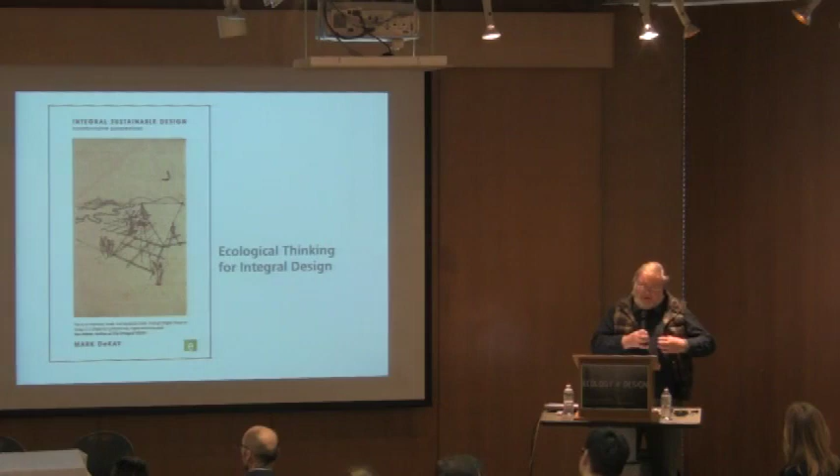Mark DeKay is a registered architect. He specializes in sustainable design theory, research, design tools and practice, and he's taught at the university level since 1992. He comes to us currently from the graduate program in architecture at the University of Tennessee in Knoxville, and he chaired that graduate program quite recently for a few years. His recent work is in integral theory and its applications to sustainable design, and it's there that Mark and I started to overlap maybe several years ago.

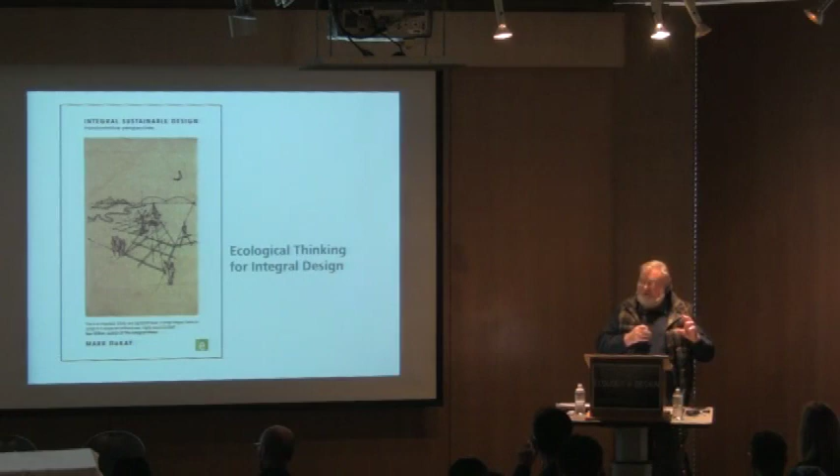We actually have never met one another in the flesh until yesterday, but we feel we have been in face-to-face contact for a long time, mainly because people who know us in common always say that we should meet one another, and eventually we have. We share this interest in something called integral theory, and I am delighted that he is here to provide you with an overview of that, because I have never been able to accomplish it yet in this faculty especially, and I'm glad to have someone else to give it a try.

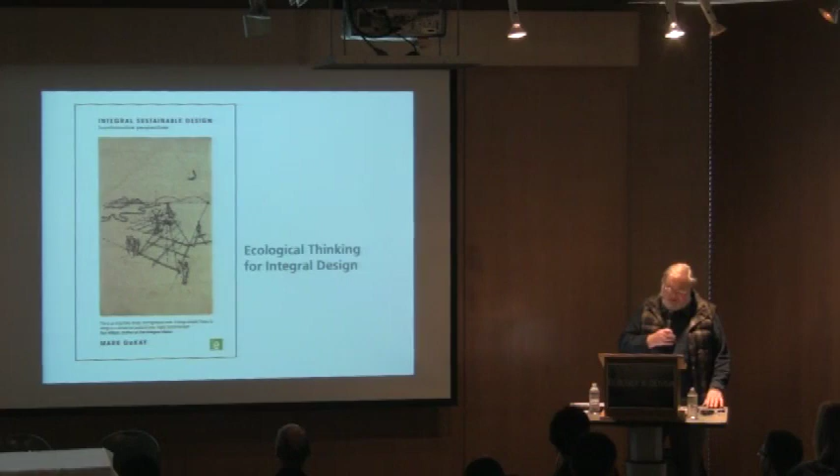He is going to be talking quite a bit about his latest book, which I would certainly highly recommend, Integral Sustainable Design: Transformative Perspectives. But you should know he also has another major publication with G.Z. Brown on Sun, Wind and Light: Architectural Design Strategies. The third edition of it is being worked on right now and will be appearing very soon.

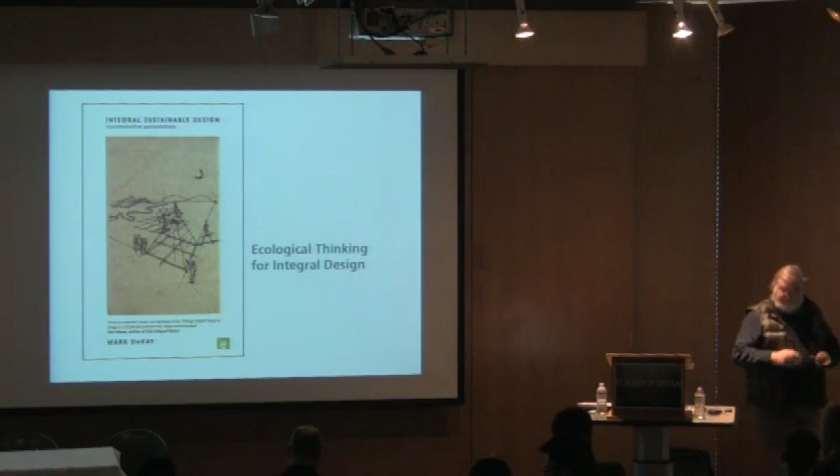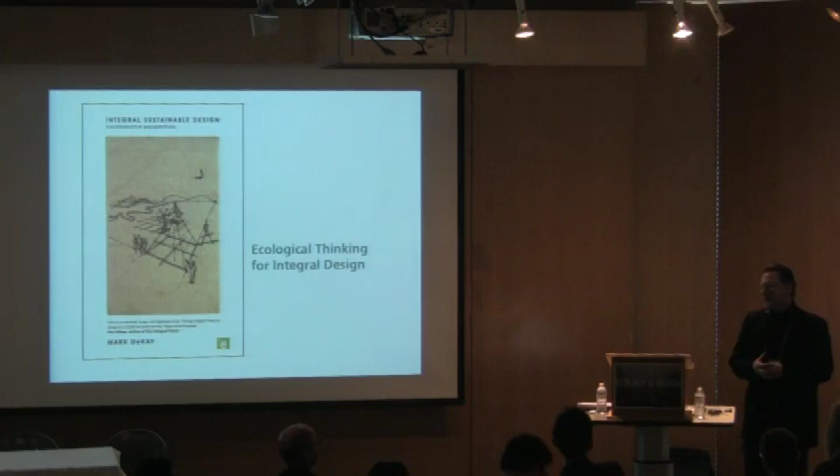Good afternoon, everyone. Can you hear me all right with the volume? Great. Well, thanks for coming. We're really excited to be here with all of you and with this kind of topic of architecture, design, ecology. It's really a gift to come with this invitation.

I'm also here with my wife, Suzanne, and I'm going to bring Suzanne up here to give us a little framing of the talk, and then she'll also be working with me in the Q&A. Suzanne is not only my wife, she runs my research lab, she's my intellectual partner, and she's also the editor of this new book. If there's any intelligibility and readability in the work, she's responsible for all of that. So, Suzanne, will you get us started?

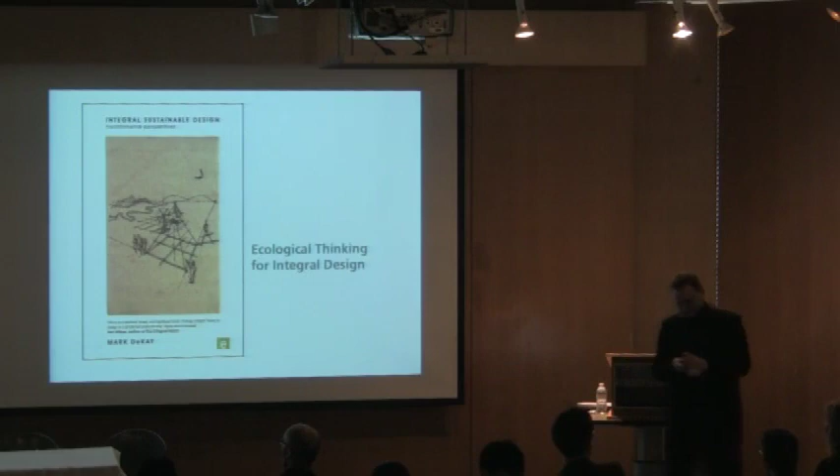Well, that was a nice introduction. Thank you, honey.

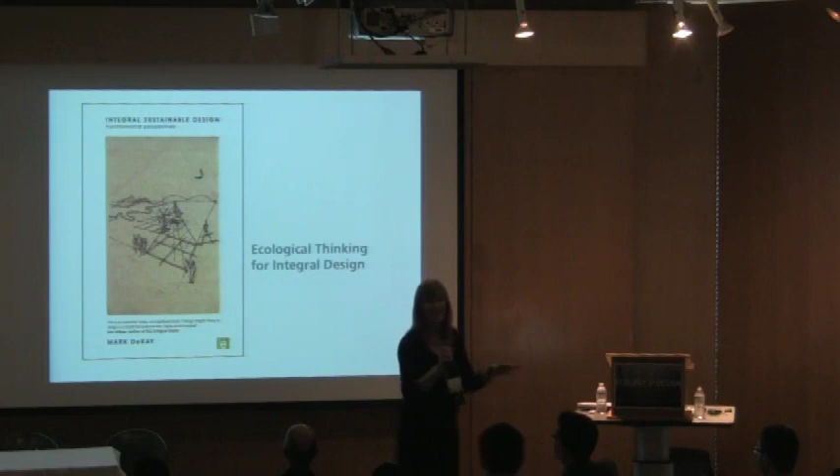The way that I'd like to set this up is to invite you, as you listen to Mark's presentation, to listen in a generative way. There are different ways we can listen. We can sit passively and let stuff roll over us, or we can get excited only when we hear something that relates to what we're particularly interested in. But with regard to getting anything from this talk, we've only got an hour, and we're probably not going to be here again soon. This is our moment, this is our time. So the invitation is to listen with elephant ears, and an open mind and an open heart.

Because some of this work really requires you to throw yourself up against the wall and rearrange your molecules, it's not easy, so if your brain hurts, that's good, that means it's working. I would really like everyone to shut off any kind of electronic devices. And as a group, let's constitute ourselves as a generative group, here to actually discover something together, here to help each other listen and hear.

That really requires not answering your boyfriend's email or texting or Pinteresting or whatever people are doing. I'm old, so I don't do all that stuff, I have one of those stupid phones. So that is my request, of course you don't have to accept it. But if we do listen as a generative group, I assert that something else will come out of our being together in this hour.

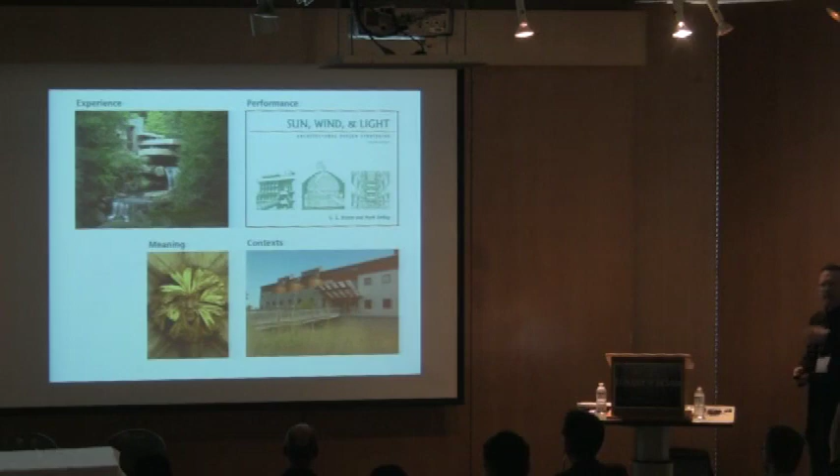And then there were other people interested in conversations about what buildings have to say to us culturally, what they mean, what the symbolic language of architecture might be. I had no idea what they were talking about either. So I began to recognize there were many, many conversations going on, and I needed to figure out how to process all of this and put together for myself at least a framework that made sense.

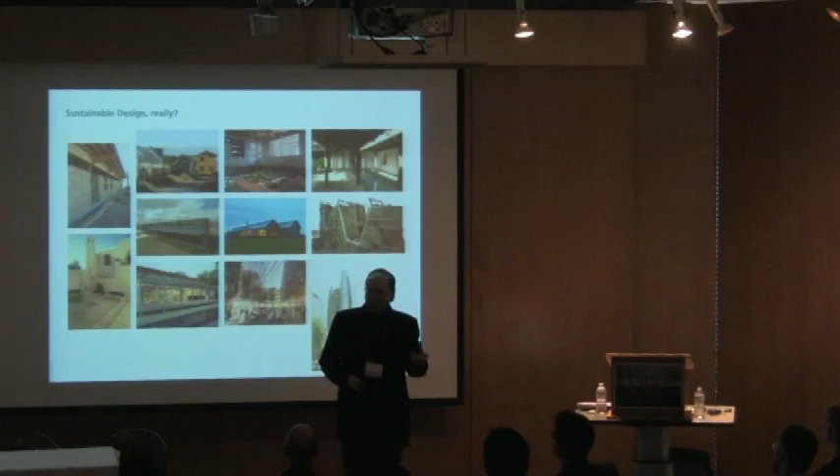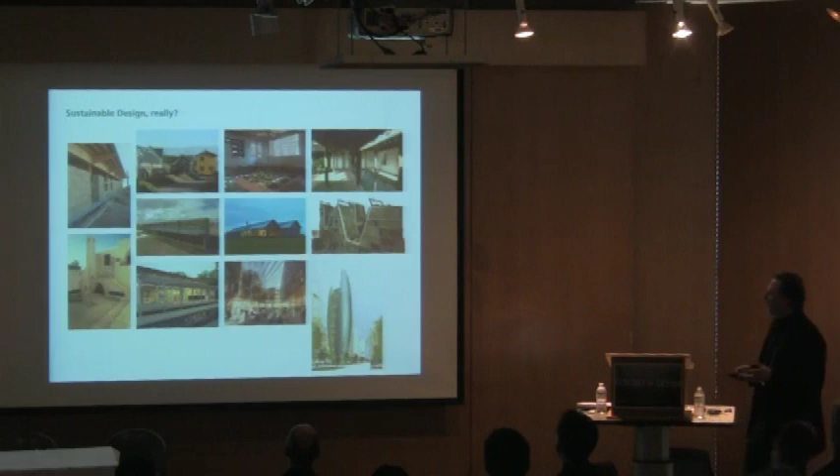As I began to look at sustainable architecture, I found straw bale buildings and traditional architecture from the vernacular perspective. There was high-tech building. There was Paolo Soleri with arcology. There was every imaginable thing out there that somebody was calling sustainable in one way or another, and how could you really make sense out of this?

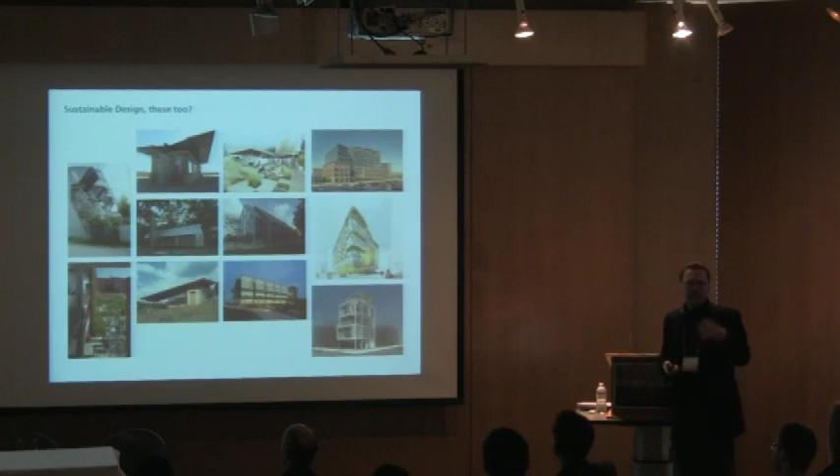And then even more: German high-tech solar architecture, sliding houses with greenhouses, landscape architectural approaches to ecosystems in gardens, and LEED certified buildings that you couldn't distinguish from the next mixed-use office building down the street that used 3 times as much energy. So I still couldn't make sense out of all of these, and that was the project.

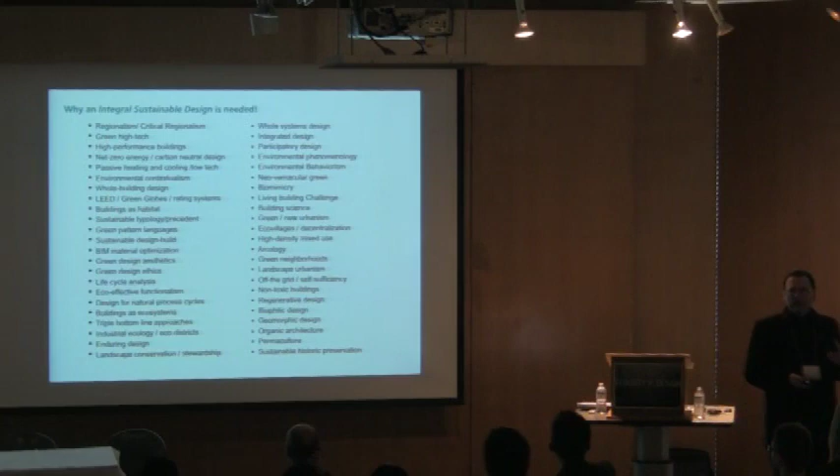I began to write down, and this is only what would fit on the slide, many different kinds of approaches to sustainable design. If you start looking around at what people are calling sustainable or green or anything in that category, there are 100 or more different disciplinary, intellectual, and methodological approaches to sustainable design. That was why I thought we needed an integral sustainable design approach.

I want to start with what I call the 4 perspectives of integral sustainable design. The talk today will be in 3 parts. We'll talk about this first, then levels of complexity, then some specifics about ecological design thinking. That's really the theme today. We're only going to look at a portion of the general content, but focus on the topic you've come here to think about, which is the intersection of design and ecology.

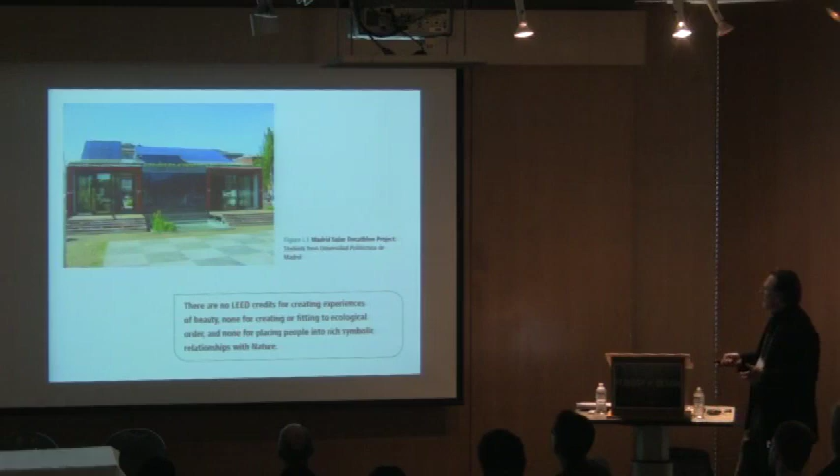But what's interesting is that if you look at something like LEED, there's no credits for whether it's beautiful or satisfying, whether it gives you a rich human experience - there's no credits for anything other than whether it's efficient. There's no credits in LEED for whether it's actually fit to some ecological pattern or context, or whether that efficiency makes sense within an ecological logic. And there's nothing saying maybe a building could establish an important relationship between people and nature. That just doesn't enter the sphere of that perspective on the world.

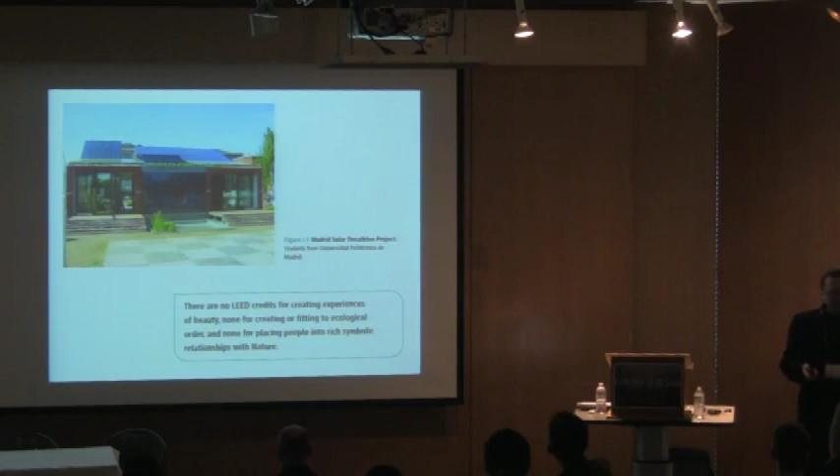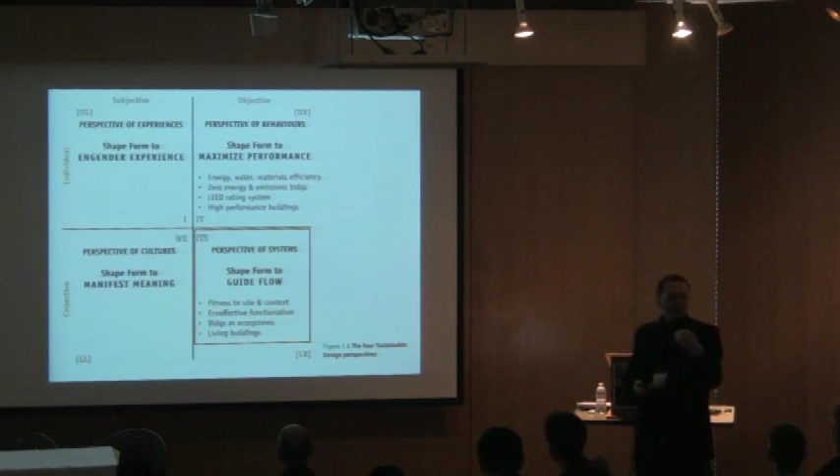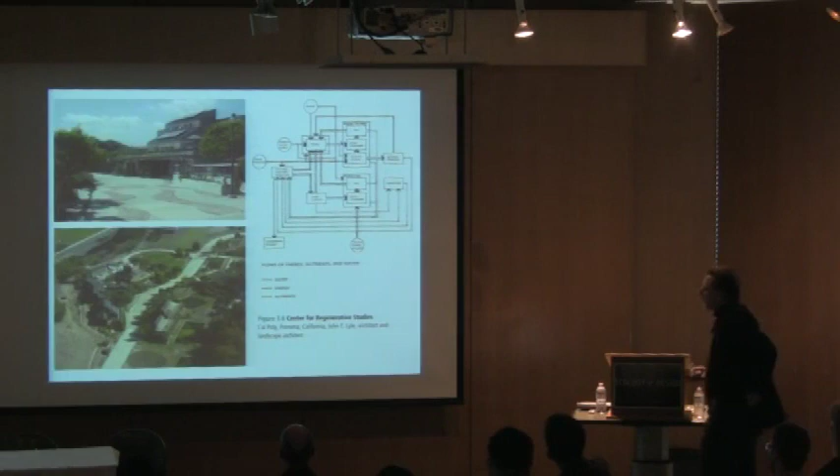Here's an example of that kind of thinking: the Center for Regenerative Studies at Cal Poly Pomona, California. It's a building that lives on its solar energy income, collects and stores its water, recycles it, creates artificial wetlands to process and clean waste on site. The students being educated here about living ecological systems live inside the facility, so it's participatory, educational, symbolic, communicative - and they're growing their food at the same time. That's an example of looking at the form of the built environment as an expression of the underlying ecological flows that keep things alive.

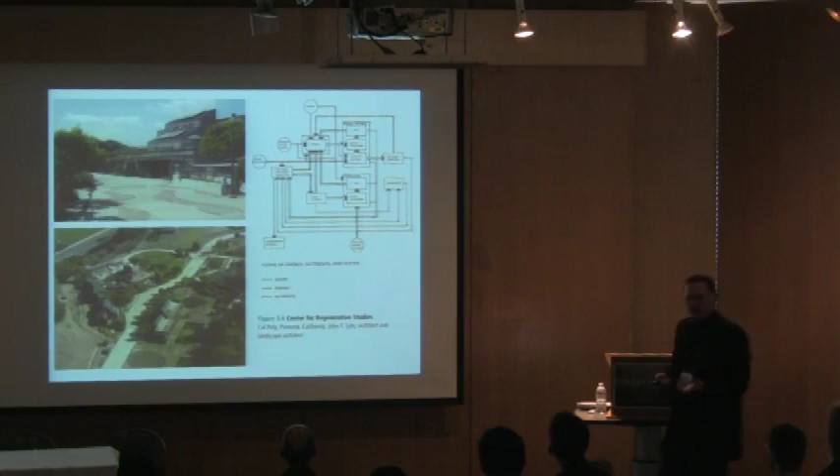From the lower left perspective, I ask the question: how do you shape form to manifest meaning? There we're interested in how people and the built world are related to nature. We raise questions about the aesthetics and the ethics of green design, and what kinds of stories we tell through the designs that we make.

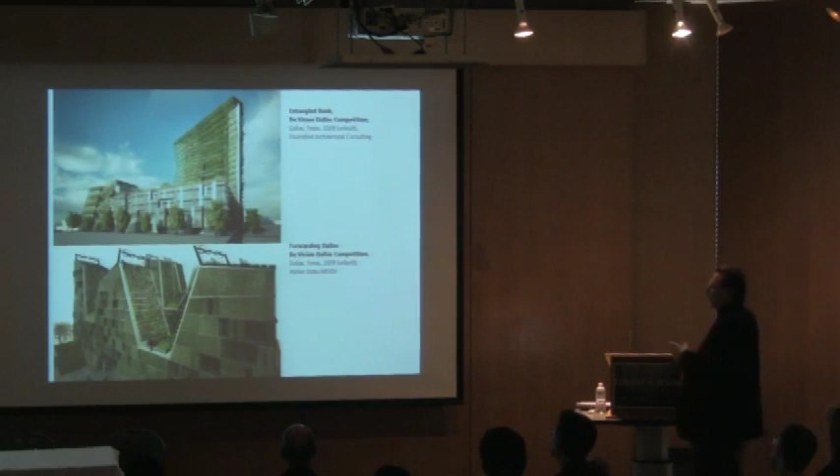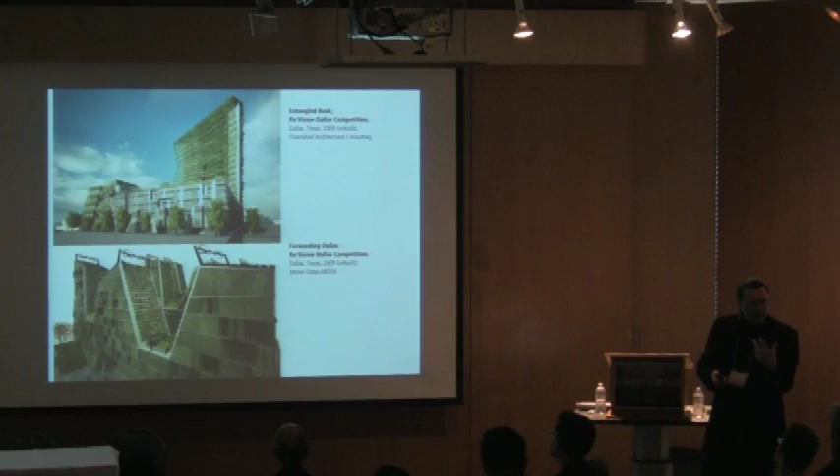Just as an example - a couple of different examples, although they look like they might have been done by similar designers - for a kind of visioning competition in Dallas. Projects that I think bring forward and attempt to express the relationship between the built world and the natural world, growing food, and so forth, telling a story through that composition of architectural form.

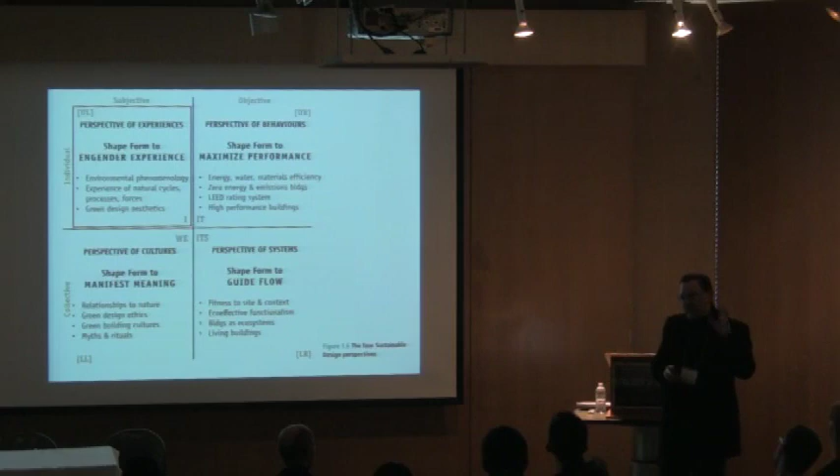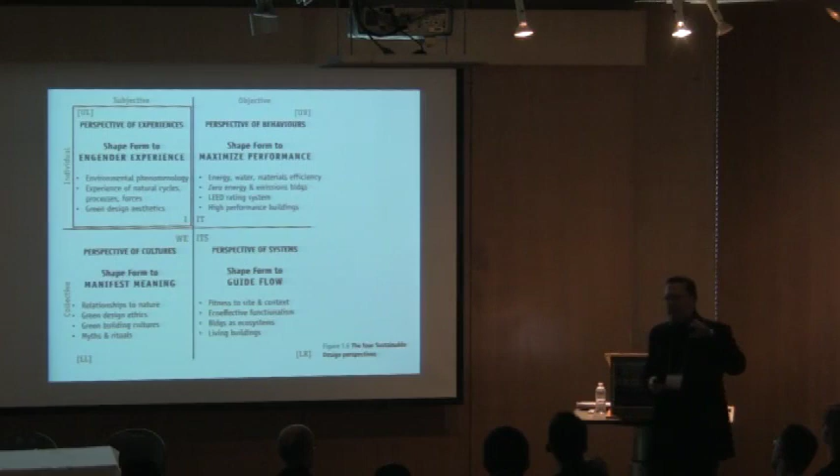Or the upper left perspective, where we're interested in engendering rich human experiences - those are the perspectives taken by aesthetics. In some realms of design, I don't know how it is in your school, but not only did I never hear the word aesthetics or beauty in my entire architectural education, graduate and undergraduate, but I can count on one hand the number of times in my entire career - and I've been teaching since 1990 - that I've heard beauty or aesthetics mentioned in an architectural design critique, in anybody's class. So these are perspectives that exist, and they're obviously a part of the built world, but we don't always necessarily have a language for them.

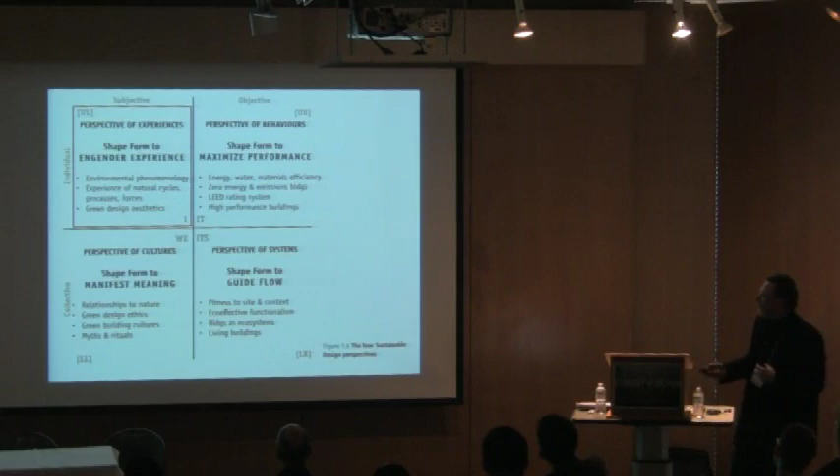So just as an example, a project by Glenn Murcutt, the Australian architect, the Marie Short House, a well-known project, which is a very simple project that just kind of sits there on the land being passive. But it's passive because it's taken into account a huge amount of complexity, like orientation, the cycles of the sun, the patterns of the wind, the geology, the trees, and everything else. His stated intention is really to set up an experience for people so that they're tuned in to those rhythms and cycles and experiences.

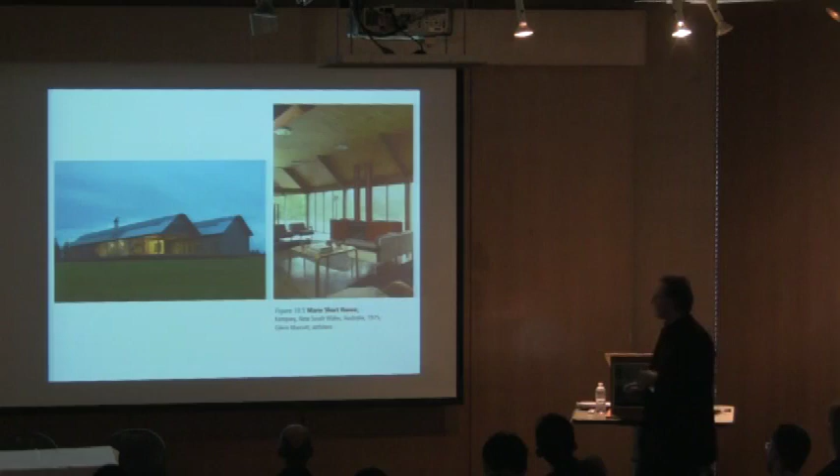So if I'm an engineer, let's just pick on engineers for a minute, and I take the perspective that the only thing that's valid or valuable in the world is that perspective of behaviors, and I'm only interested in how efficient I can make something, then I'm leaving out a whole bunch of things that are important to design.

On the other hand, if I'm holistic, right, so I moved from being a gross reductionist to being what Wilber calls a subtle reductionist, or a holistic thinker, or an ecological thinker, then what happens is all of the interior realms can get collapsed, so that the only thing we think is important is that systemic, holistic, ecological, objective view of the world.

Now, if we're over there, it doesn't make any of this invalid. You just can't go over here and talk about anything to do with meaning, culture, aesthetics, or experience from the point of view of systems thinking. And that's really important because that's what I'm going to be talking about.

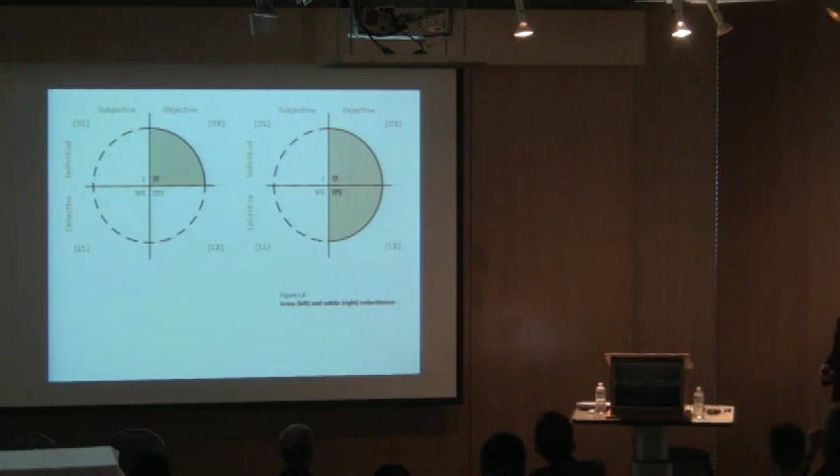So I'm going to be talking about this perspective mostly, and we have to remember that it's one of a multitude of perspectives that are important, and it's valid and true in its own domain. But its methodologies cannot be used and expanded and pushed over into other domains or do violence in any way to them. Now, I'm not the only one to start talking about this stuff.

So then I began to think, well, that's great. That explains some of those conundrums I was in at the beginning, and how I could begin to map out why, if I was speaking from one of those value domains or perspectives, people who were really oriented and saw themselves thinking from or looking from those other perspectives — why what I was saying wasn't really landing on them, and maybe they weren't as excited about it as I was. But it didn't quite solve everything.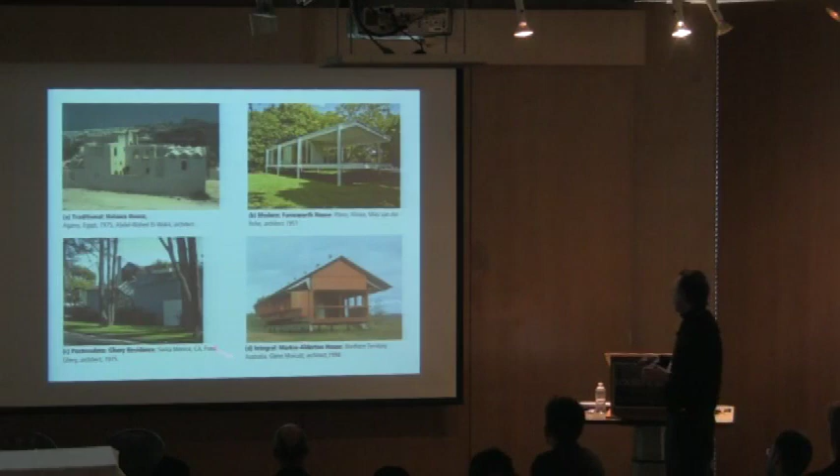So I began to look at development. In integral theory, developmental models and developmental sequences are very important. We're mostly familiar with this kind of sequence, although we tend to associate it with styles and time periods, neither of which I think is accurate. What we really have, in the progression from a traditional way of thinking about design, to a modern way, to a Frank Gehry postmodern way, to what I'll call an integral level of thinking about design, is a shift in consciousness, a shift in worldview and a shift in values. Those values—don't get stuck, you architects, on the imagery—but this shift makes possible a new view of the world, bringing forward new possibilities that show up within the realm of design in different expressions.

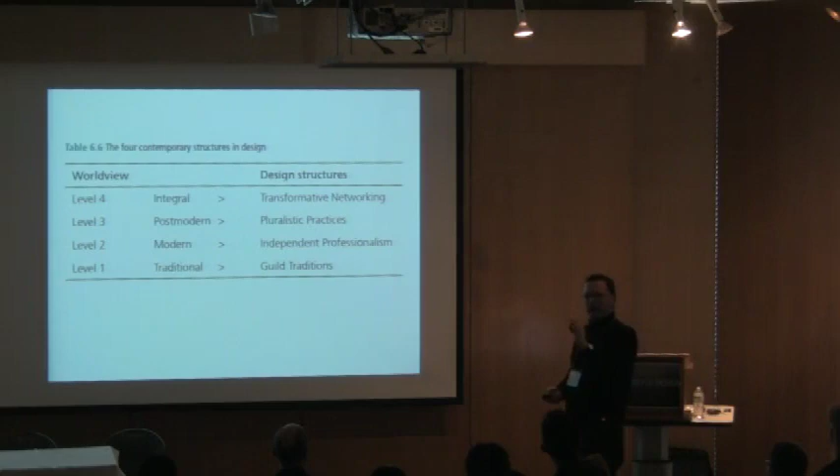So I organized it like this: we can have at least these four, and we could probably go further down—the traditional takes into account a lot of previous history and worldviews, and there are probably things beyond the integral. But mostly we have these four kinds of worldviews present today, possibly in this room, but certainly in a neighborhood meeting or city council meeting. So we have the traditional, where the professional structure is embedded in the guilds. We have the modern worldview, where professionals were independent—I was educated in a modern architectural school, and it was all about individual expression. You've heard the term 'object building' perhaps—we were all about object buildings. The more object, the better; the more extracted from its context, the better.

We also have what you might call pluralistic practices. Most schools of design operate at this kind of postmodern level, where there's no longer a single theory—there are multiple theories present at the same time, and you can't put them together, and they don't add up to anything.

But they're pluralistic, and your theory's okay, and my theory's okay, as long as we don't bother each other too much. And then the integral perspective is interested in putting that fragmentation back together. I call that transformative networking. It's connecting those differences, but it's also transforming and transcending the individualism of the modern and transcending the disconnected pluralism of the postmodern.

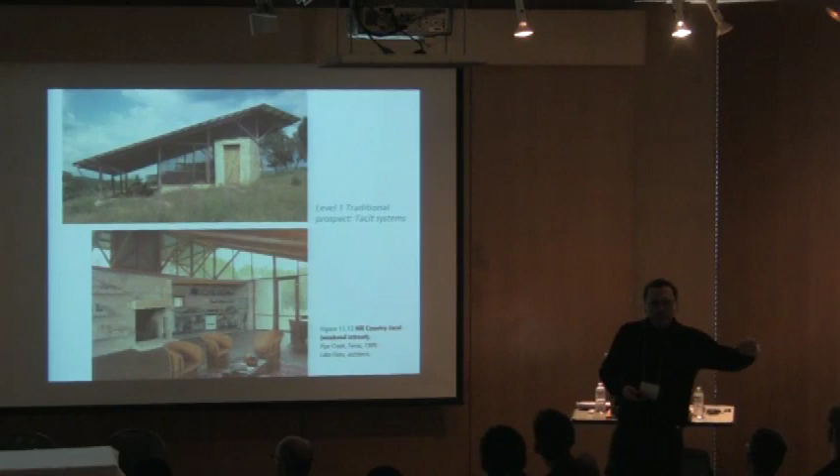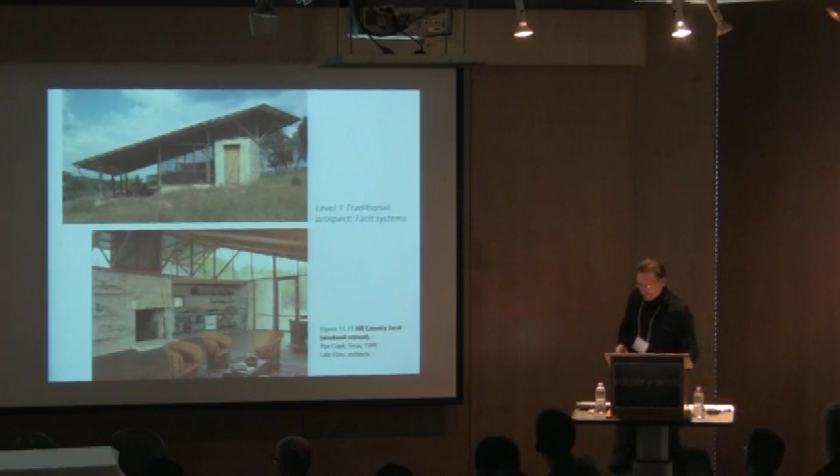This is tacit systems. Tacit systems are essentially things that are embedded. So to the traditional worldview, there is no such thing as an ecosystem. Ecosystems don't exist for the traditional worldview. They don't show up on the horizon of what rises to awareness. They're embedded in the practices, embedded in what works. The things have changed little, by trial and error, typically over hundreds or thousands of years.

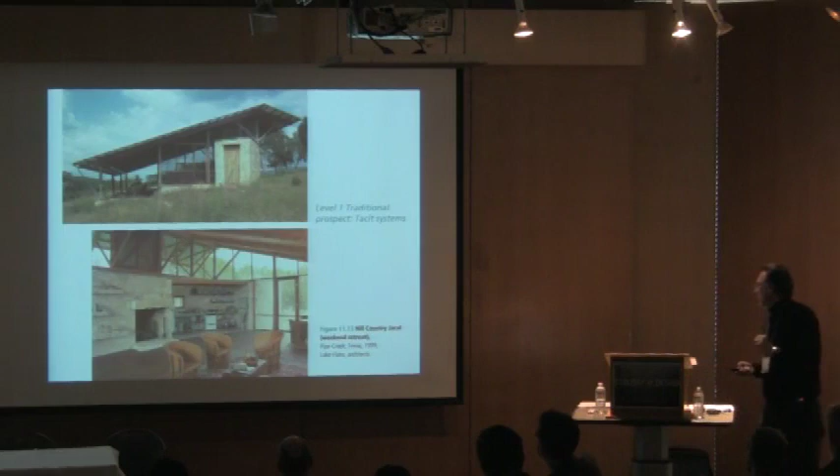And so here's a project that does all those things. It backs up to the north wind, it digs into the site, it creates and modifies all of the kind of cycles of the climate that are going around there to make this kind of little weekend thing in a hot climate in Texas.

Now, the modern prospect on systems is logical. The modern prospect is interested in the system as a way that it connects. So this is the Cellophane House by Kieran Timberlake. It was a proposition for the Museum of Modern Art.

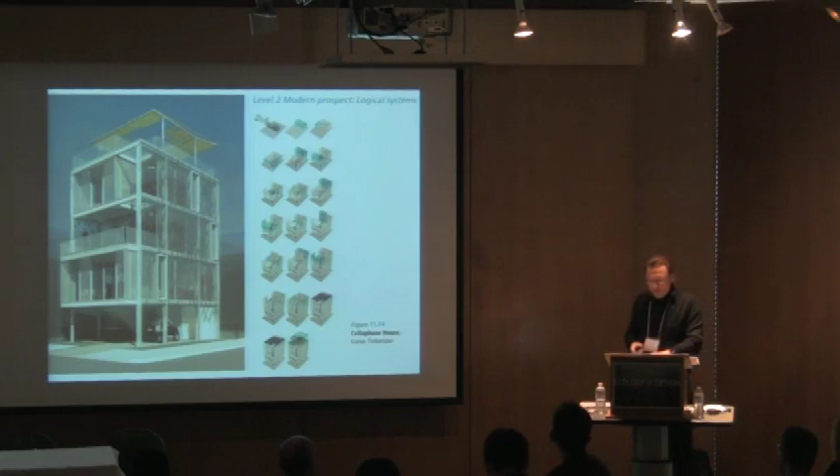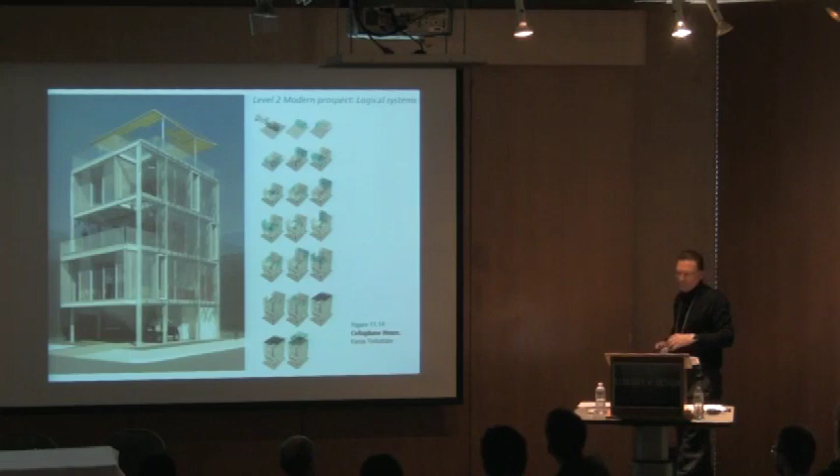And it works together in a kind of rationalized, industrialized way with prefabricated parts and things that are reconfigurable, and you can put the whole thing together and it comes off of a truck and so forth. That's a logical kind of way of thinking about how a system works. It's linear, it's abstracted, it's rational, but it's also kind of organic in the sense of organic architecture—that is, you can design from the big scale down to the small scale, and it all fits together in some way. So that's a different view on what a system might be.

At the postmodern level, you really have to distinguish between the lower left cultural perspective of postmodernism and throw away the visual stylistic expression of postmodernism to get your head around the postmodern perspective on lower right systems approaches. What does reality look like from a lower right systems perspective when you cognitively operate at the level of complexity that postmodernism takes into account? It's very different when you take a lower left perspective of cultures—you say design is what design means inside of the culture. But when you take a postmodern level view on the lower right objective systems, that is nature, right?

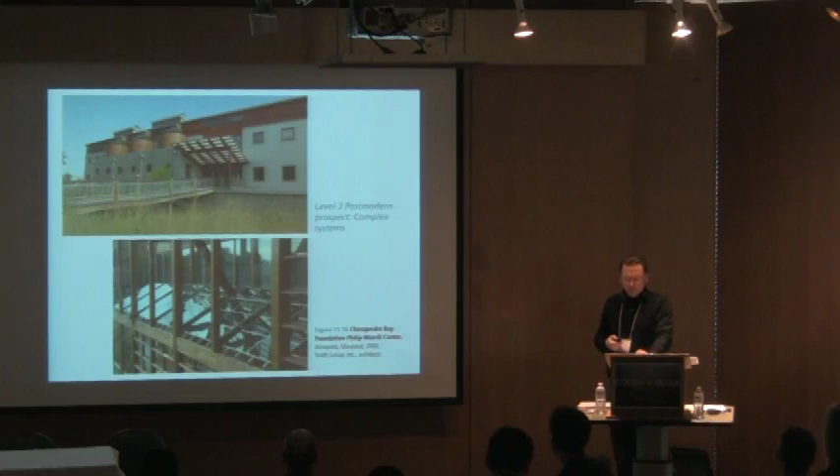It sees things as cycles. It abstracts the models, but it places those models into even larger models. So you start to think about how things are connected and how they organize into what we have begun to call things like an ecosystem. Before, I don't know what the date was, roughly 1920, the word ecology and ecosystem didn't exist, right? We had to wait around long enough for humanity to begin to make enough connections to see that there was something like a system out there in the way that we currently conceive of ecosystem as some kind of a web or network of cycles.

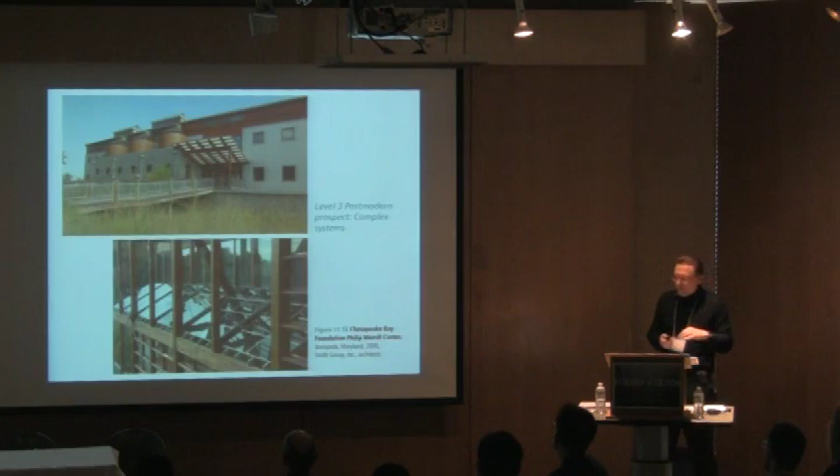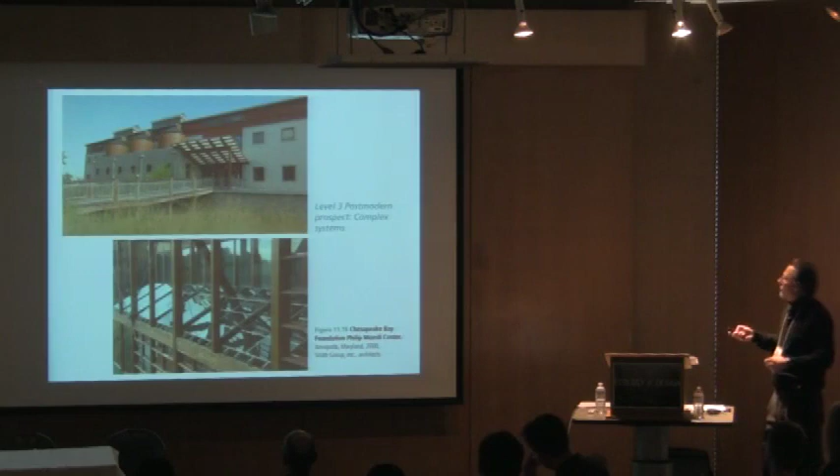So here's a building, the one I talked about in the very beginning. As another example, the Chesapeake Bay Foundation's Merrill Center, the first LEED Platinum building. It's really a building that takes water as its theme. The Chesapeake Bay Foundation is about cleaning up the watershed, and it begins to look at how the building fits into the context of the water cycle. So they're looking at collecting and storing water, restoring and creating wetlands that had been destroyed, and they have permeable paving and all of that sort of thing.

And then at level 4, what we might call the integral prospect, we start to think about living systems. That living systems view is maybe the most complex way we're thinking about things now. It doesn't mean that's the be-all and end-all of it, and that's interesting when thinking about development. Bob Berkebile, a fairly well-known American sustainable architect, says that what designers are really doing is making nature. It's designing for the ecological pattern, so we have ecological systems in which humans are part of a living ecosystem.

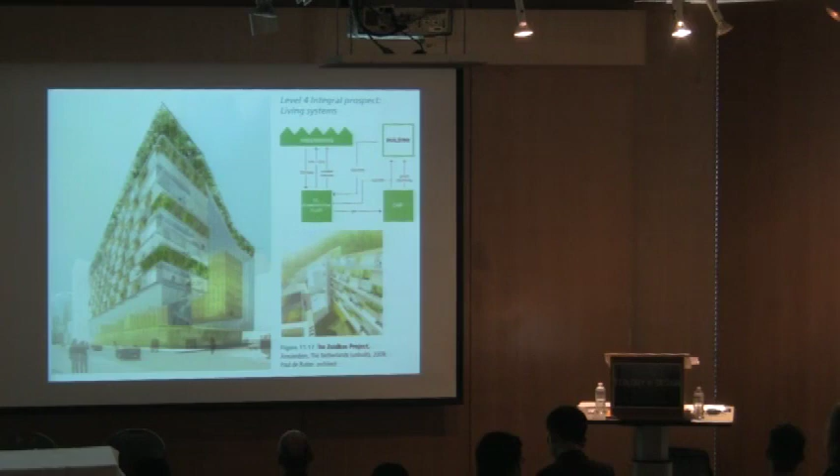Whereas the postmodern perspective is interested in saving nature, the integral perspective that sees the world as a living system says you can't really pull those apart. We're influencing everything on the planet, even the ice in the Arctic, right? And so there's no such thing as an out there for nature.

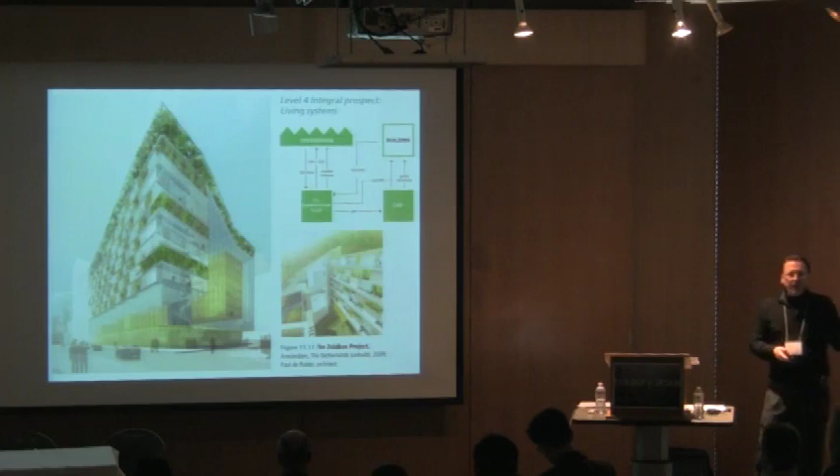Here's a project from the Netherlands, a proposal. This is the idea of having a greenhouse in an urban environment, growing food and connecting it up with the needs of the building, making power and fermenting the biomass that's the waste from the greenhouse, using that for biogas and so forth. So you start to see this whole construction as an integrated set of flows of what it takes to keep life alive on the planet.

Here's an example from Sweden, in the city of Stockholm, where they're taking a whole sector, a whole new town development, and extending that same kind of logic. So here's the architecture in the middle where people live, and then you have all of these kinds of flows of energy, materials, recycling, and so forth, just like a natural system does. So it's learning from natural systems and using those as a model for constructing an urban environment.

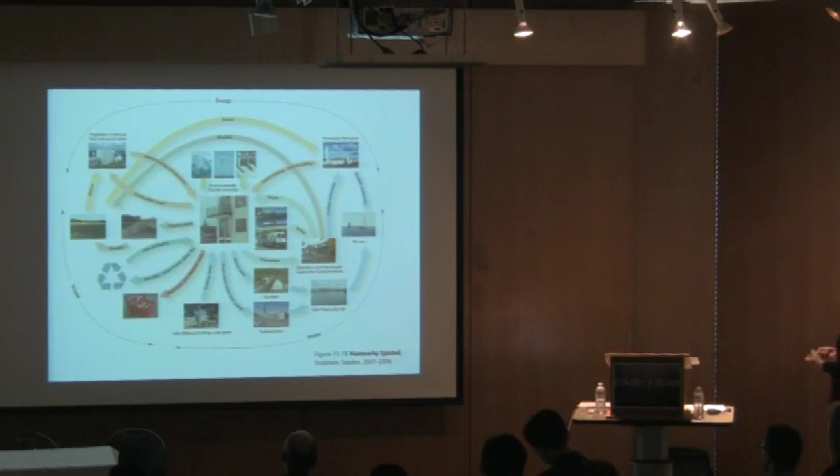Okay, so we've got those. What's that? That's two what? Okay, I got to run then.

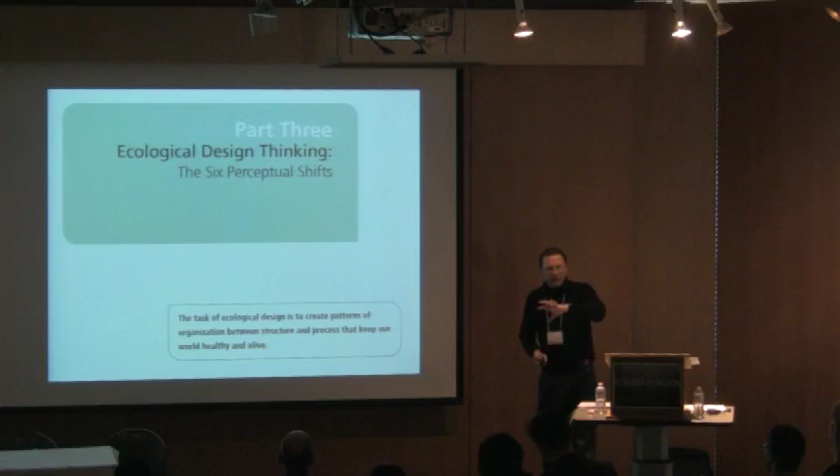Yeah, okay, thank you. So we have ecological thinking, and that's really what it takes for us. So what it takes, if we're trying to figure out what the ecological patterns are in the lower right, is how we have to actually shift our own thinking in our own individual interior from this upper left perspective of experiences, which is also the realm of the individual self. And so there are these different levels of complexity, and what's suggested here is that each perspective can show levels of development, and that it's ourselves that have to begin to look at increasing and changing our own perspective so that we can develop and be able to think ecologically.

Now, I'm not making all this up. There's lots of developmental models and systems out there. One of my favorites is quite simple. It comes from Jean Gebser, who's famous in a lot of fields, and wrote in 1949 about the epochs of human civilization, which he called the magic, mythic, mental, and on the top he called it integral.

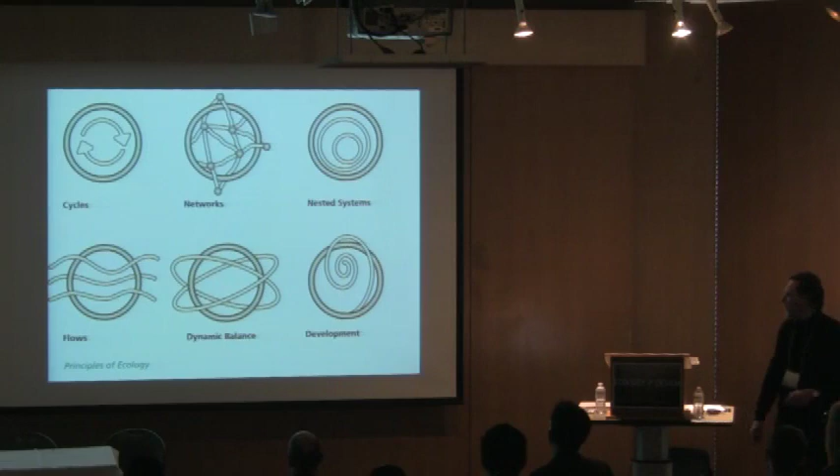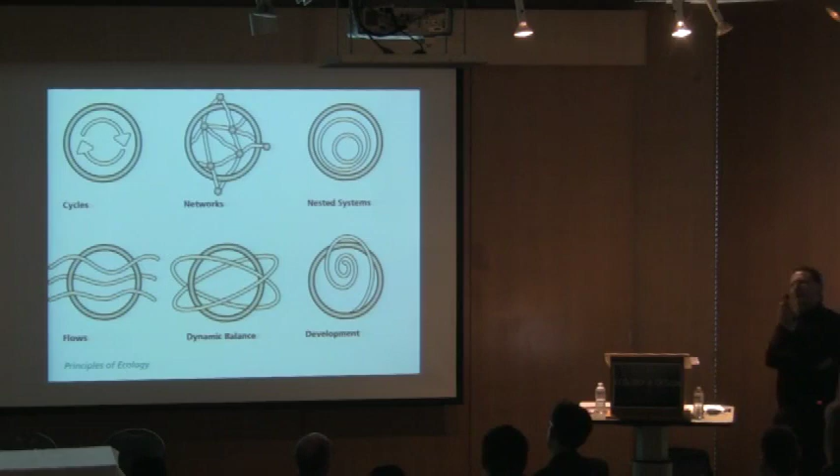It also turns out these networks are organized in nested systems, systems inside of systems, in a hierarchical organization, and that systems over time show some degree of change and development, in some ways toward greater levels of complexity. So the question is, how do we actually begin to see these things in the world, think about them, and design them?

Those require really significant changes in our own perceptions. I'm going to argue that the fundamental perception is this connection between form and process. That's the essential theoretical imperative for ecological design.

Now, form and process are fairly easy to understand. In architecture we sometimes think of it as form and function—we've heard the phrase form follows function. That's similar to anatomy and physiology in medicine. You wouldn't want your doctor just thinking about your anatomy; you want them intimately understanding your physiology too. Imagine the doctor trying to take apart anatomy and physiology—they'd laugh at you, because they're all working together all the time. That's how it is: there's process present and form present, and those are two sides of an interrelated way of seeing absolutely everything.

But we don't really do that all the time. Here's Capra's criteria for living systems: he says you have to have patterns of organization, structure, and life process—those are the three basics. Life process is what makes it go, the whole thing that's flowing and changing. The structure is the object nature, what's guiding the way everything flows—it's the hardware. And the pattern of organization is the geometry, but also the order of things, like networks.

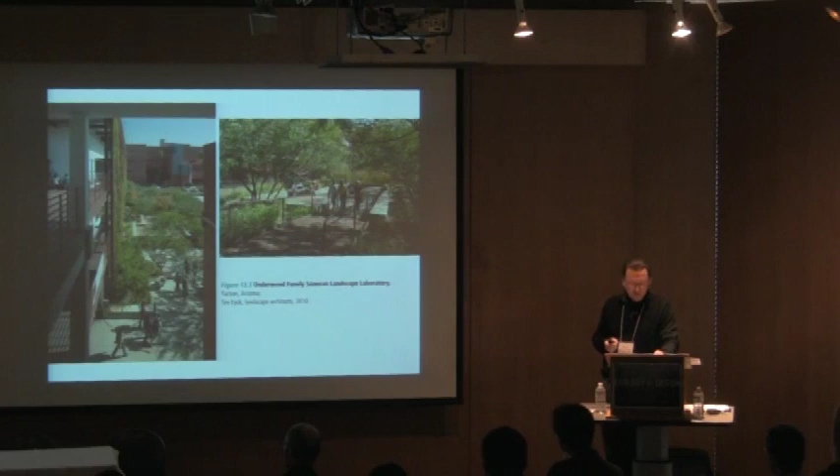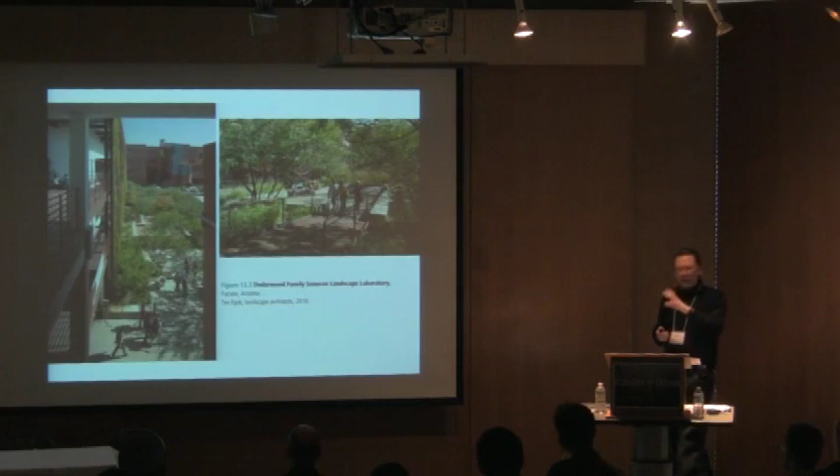As an example, this is the Underwood Sonoran landscape at the University of Arizona, a project organized around ecological and social relationships. It exemplifies sustainable strategies of water harvesting, climate regulation, air and water cleansing, recycling, urban wildlife habitat, and human well-being. But if you look at this landscape merely as a compositional object, as a formal thing, you actually miss every one of those issues—they don't even arise. So it's a shift to see how this thing is made up of a set of relationships.

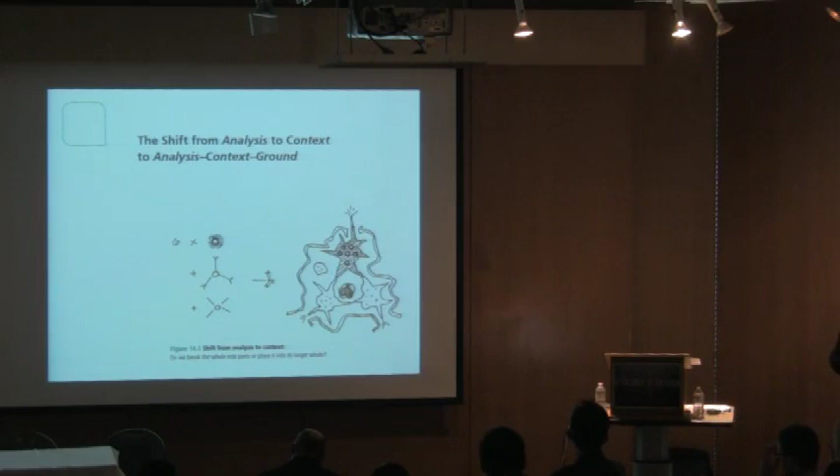Each of these kinds of shifts actually contains two shifts: one is essentially a shift from modern awareness to postmodern awareness, and the second is maybe a shift more towards integral awareness. We don't really have time to go into all of those, so I'm just going to focus on the first one for the most part. They're all in the book though—Susie wants me to remind you—there's a chapter on each one of these things.

The shift from analysis to context asks us to understand something in the world not by breaking it down, not by trying to understand its constituent parts, but by taking that same object or focus of consideration and placing it into something larger—placing it into its larger system.

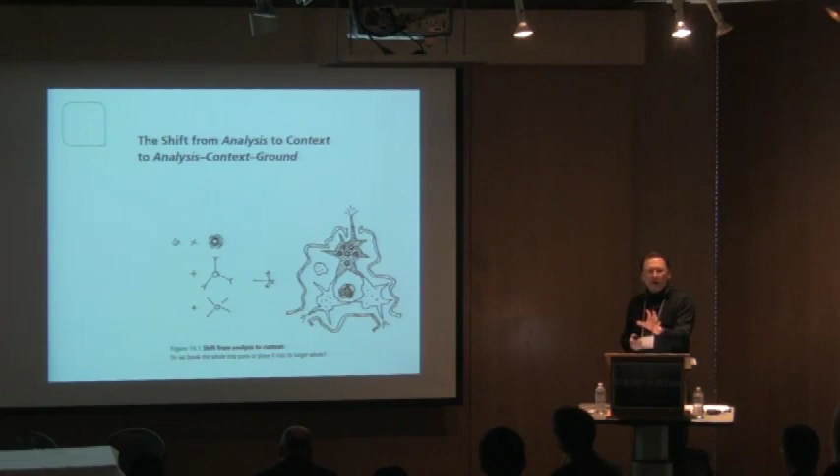If we take something like a wall or facade and look at it by breaking it into its parts—so much glass, so much insulation, so much concrete—that's one way of understanding it, and it gives us something important. But if we place that same facade into the context of Miami or the context of Winnipeg, our interpretation of that same wall is completely different. It's fairly fundamental, and something we're more and more familiar with in design now.

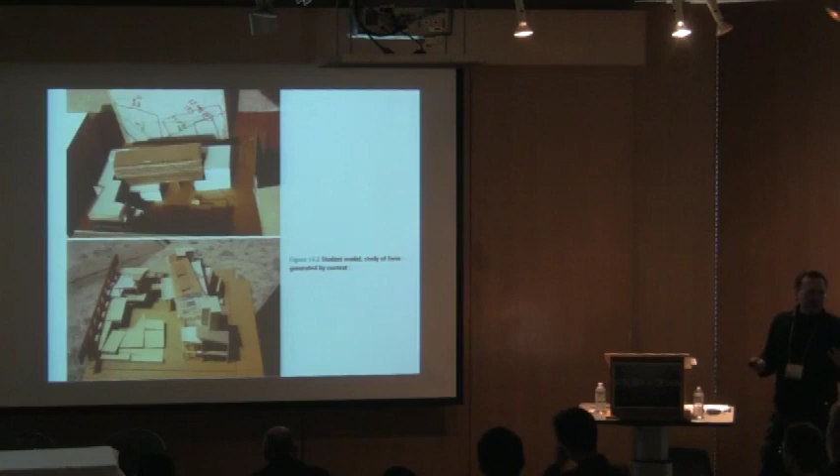Here's an example of a student project in two different phases, very early studies and a bit later studies. This project is set into an urban context with a railway on one side and existing buildings. It tries to understand the context in two ways: what are the patterns of sun and shade created by the surrounding buildings, giving constraints and opportunities to the project; and how can that building be shaped and massed so it doesn't cast a shadow on its neighbor during times when that neighbor might want the sun. It's a fundamental way of looking at context, but one that completely changes how the project might be shaped and formed.

The shift from structure to process: are we looking at the form itself as its anatomy, or do we see its flows and its physiology?

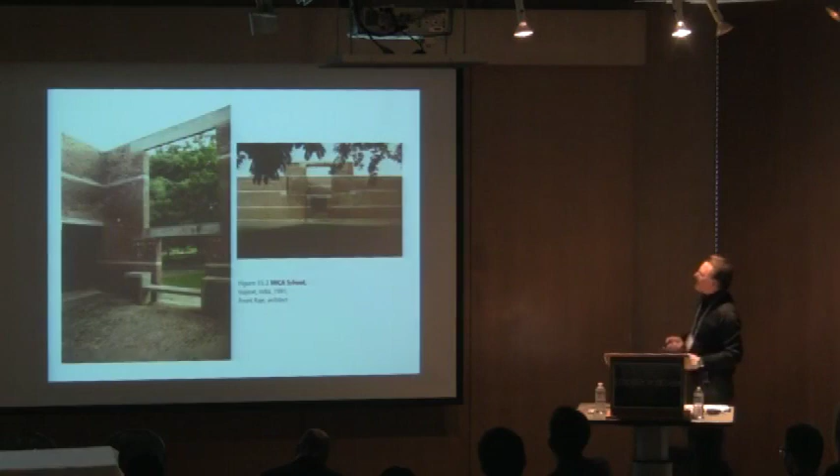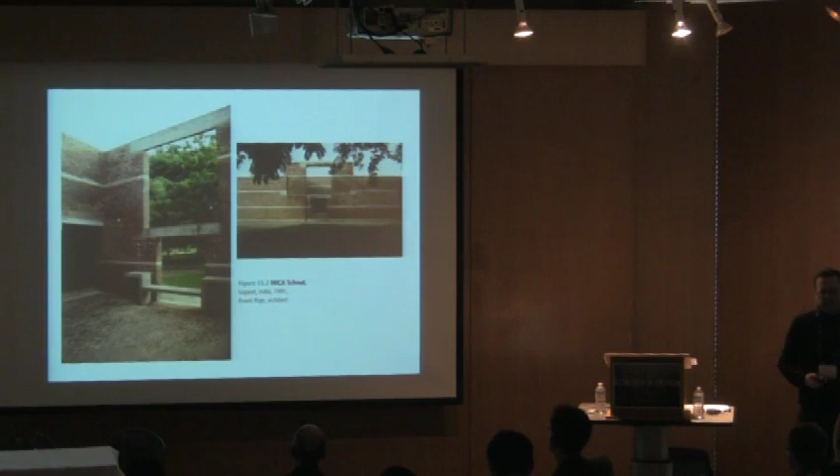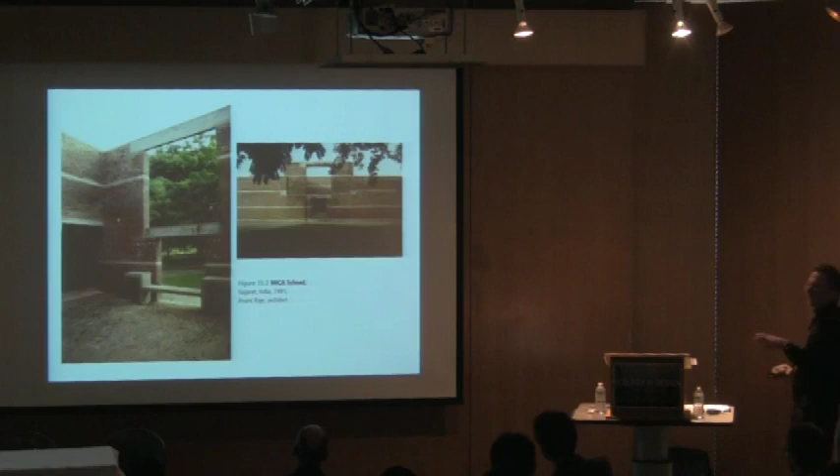Here's an example of an Indian project by Anant Raje, kind of the heir to Louis Kahn in India. Looking at the process of the sun—this is the western facade of this building and has almost no windows, because the intense Indian sun is severe; it's the thing you design around. So he's created courtyards, and facing onto these courtyards are large openings, but set way back into another layer. So you can have relatively large openings in a climate that says never have large openings, but done in a way that always looks into another space that's more protected.

It's a fundamental understanding of the process at work, showing how the form is completely shaped and organized around that understanding. The shift from materiality to configuration essentially moves from the question of what something is made of, which is important, to asking what is its pattern. So from materiality to configuration goes from 'what is it made of' to 'what is its pattern'—and a pattern in this sense is a configuration of relationships, process relationships in ecology.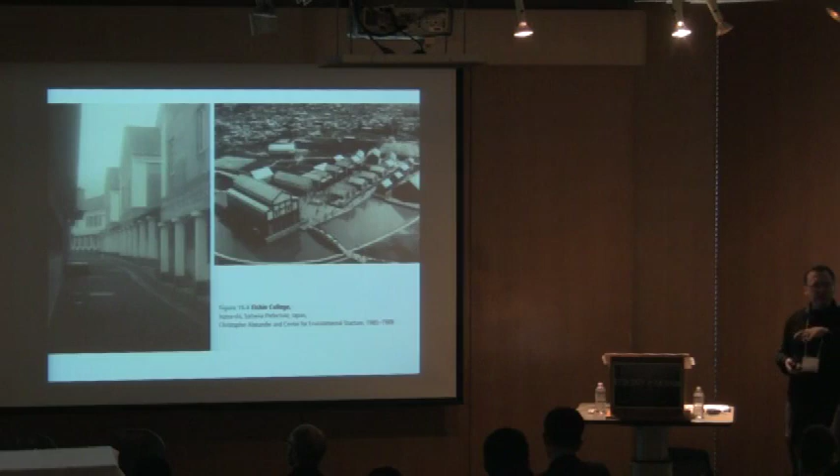Just for example, 4 patterns out of the 200: separate classroom buildings, not a big school, each building like a house, gardens between the classrooms, paths connecting the classrooms, exposed to the rain. You can see right away the kind of experience that's possible. I'm not saying this is an ecologically designed building, but this way of thinking does forward a degree of sustainable design about how people experience the place, the elements, the rhythms of the climate, and so forth.

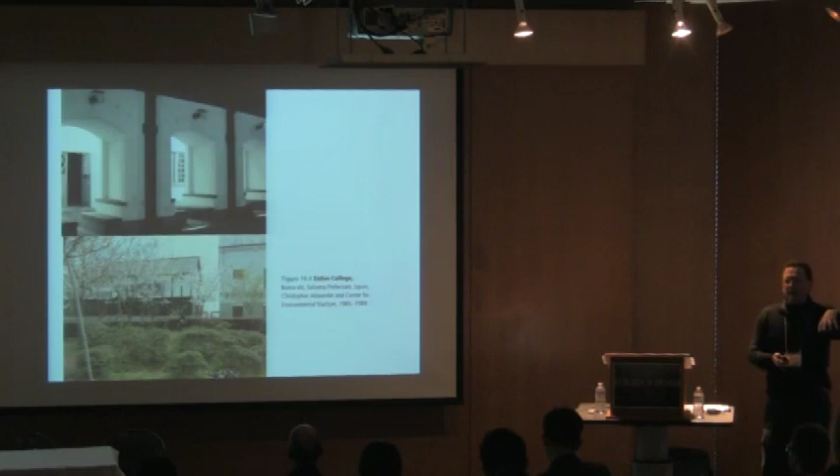When you connect a series of patterns into a family of patterns that are related to each other, you have what we call a pattern language.

We're using pattern language in this sense in the new edition of Sun, Wind, and Light, my book that deals with passive solar architecture, natural daylighting, natural cooling systems, net zero energy architecture, and so forth. Each one of these icons represents an individual piece of architectural knowledge about how to do something important in passive architecture. This whole composition is what we call a bundle of strategies, and those bundles are organized at multiple scales and connected to each other in significant ways.

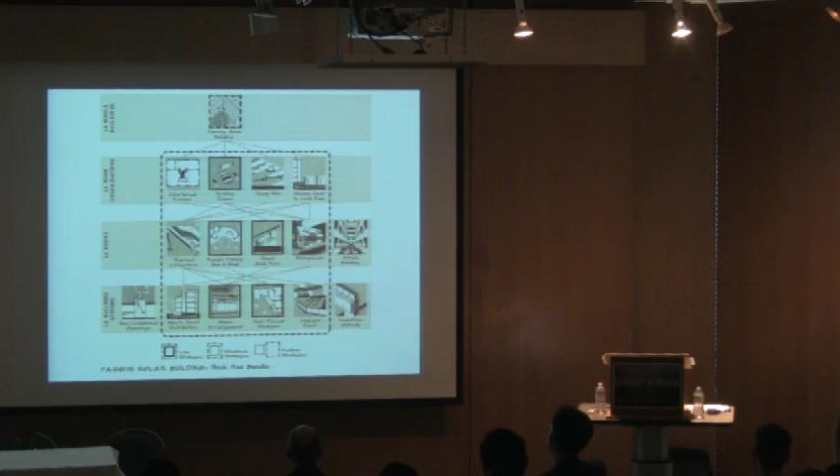What's important is what's inside this boundary here is significant, and those are the things you might always want to consider in this case when you're designing a passive solar building with a thick plan. That's the nature of the problem.

The point is that not only is everything connected to everything else, which is a kind of truism, but they're connected in important ways that hook them up together, in ways that they actually work together to solve a kind of recurring problem in design. The shift from parts to wholes is a shift from how we think about things piecemeal to how we think about them in their wholeness.

In a sense, I get the direct experience of wholeness when I'm in nature. This is an example of a project in Denmark, where I had that kind of experience of wholeness when I was visiting. It's a typical European multi-story apartment block with a big courtyard interior, which originally was a car park, and they turned it into a park for the people.

But the interesting thing is it's not just a playground and a recreational park. Inside this glass pyramid is an artificial ecosystem that cleans all of the waste, all of the sewage, all of the toilet waste from the entire neighborhood development, and then puts that into an outside constructed wetland in different degrees of treatment—by this point it's tertiary treatment. So you can go out and have your picnic in the sewage treatment plant in the middle of your block.

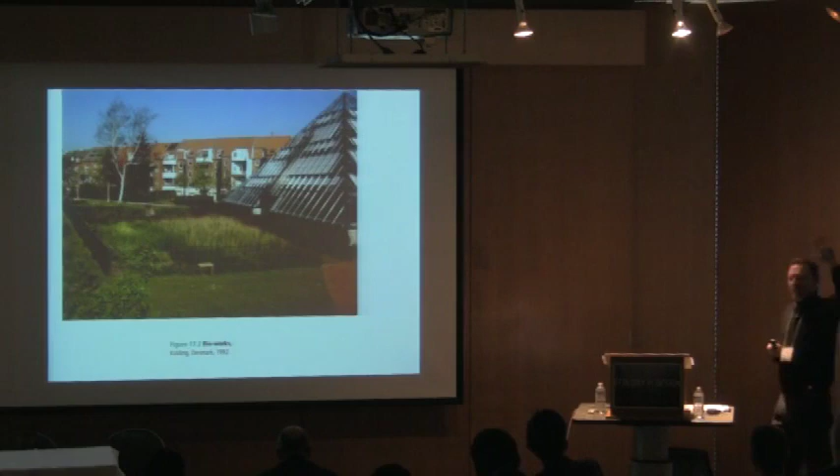That is real closing of the loop, giving a sense of a kind of living world that we're not isolated from. It's not piecemeal, it's not out there someplace, it's right here and whole and ready for us.

Then there's the shift from hierarchies to networks. Modern thinking likes trees, likes hierarchies and pyramids. Postmodern thinking says forget hierarchies, hierarchies are bad because they make power—but remember, that's the cultural lower-left perspective. If we're looking at systems, hierarchies are good. There are lots of hierarchies out there, but we're going to talk about networks, which is how those process relationships get hooked up together in patterns that make sense and work together to keep things alive.

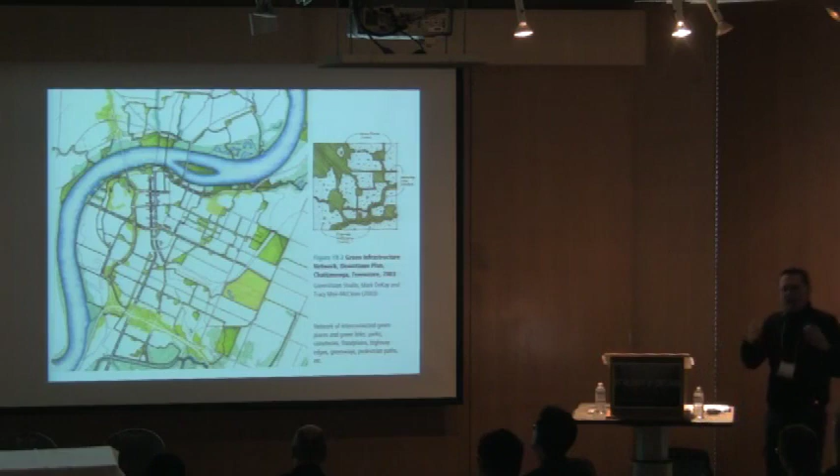Here's one of my projects working in downtown Chattanooga, Tennessee. This was the downtown plan, and this is the green infrastructure plan for the city. There were 6 or 8 different organizations involved in the city, all having to do with green space—from the city parks to a national park, to the streets department, to the people making greenways—and they were all operating independently. Nobody ever put their green stuff on the map together.

So we began to put it all on the map together and ask how we could hook it up, how we could make it into a network, with sort of a landscape ecology model, having patches of habitat and corridors that connected them, operating inside of some kind of a matrix. And so that's network thinking.

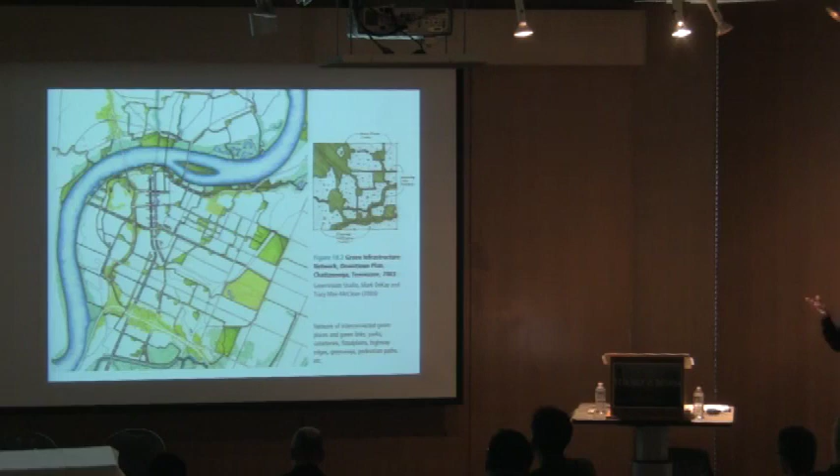We're also looking at how to create this kind of network thinking in a multi-hierarchical way. Before, I said things were parts and wholes both at the same time. That's what we call a holon. When you hook up holons together, things that are both parts and wholes, and organize them hierarchically, we call that a holarchy. It's a fundamental organization of nature and a fundamental organization inside a system's view in the lower right perspective.

This is just a sample of the entire knowledge base from the new Sun, Wind, and Light book. There are 106 or so strategies and design techniques. In the new book, this is only the largest scales, from neighborhoods down to buildings. There's a whole bunch more that go below that. But you get the idea that you can begin to think about knowledge as a network too.

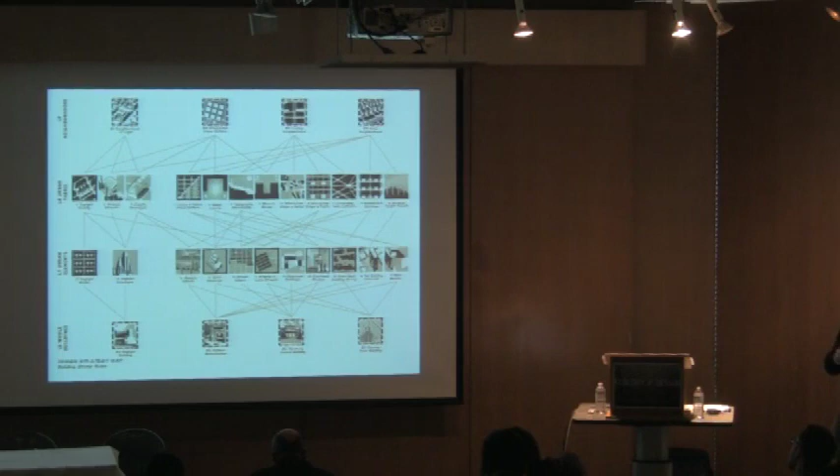So those are the six shifts. Here's briefly where we've been. And I want to remind you one more time what Robert Kegan, the Harvard psychologist, says: that taking that perceptual shift really isn't just more stuff that you're seeing. It's a whole new way that the world shows up. It changes absolutely everything about what's possible to exist on the planet for you, or for me.

Let me end here with the notion of this spiral of consciousness. This is that same notion that Sim van der Ryn was taking from Jean Gebser before, which says that we are moving towards an integral awareness, or what van der Ryn calls the ecologic. I think that we're at the edge of a great cultural transformation.

We find ourselves at this place of human development that's been hard-won through thousands of generations, and we're at this great point of opportunity. And yet, it's not that we need more knowledge. It's not that to make an ecologically sustainable design we need more research, more information. We already know 100 times more than what we're actually doing.

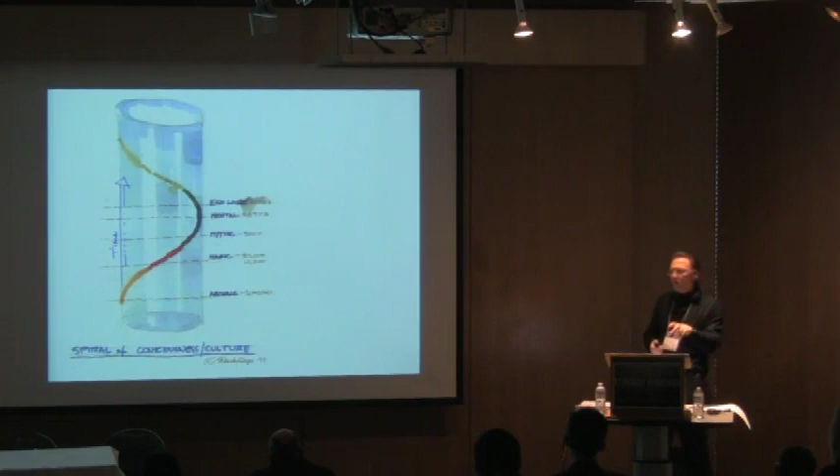Maybe 1,000 times more than what we're actually implementing. It's also not that we need to get some new brain power. We've got plenty of smarts. We've got all the hardware that we need. You're sitting in a conference about architecture, design, and ecology. Both of those things have 1,000 variables. So now you're intersecting two realms that each have 1,000 variables.

Just that you're interested in that enough to be sitting here means that you're operating at an integral level of cognition, and that you have all the hardware necessary and are all up to the task. So what there is to do is rapidly transform our schools, our practices, and our institutions towards incorporating really significant ecological thinking.

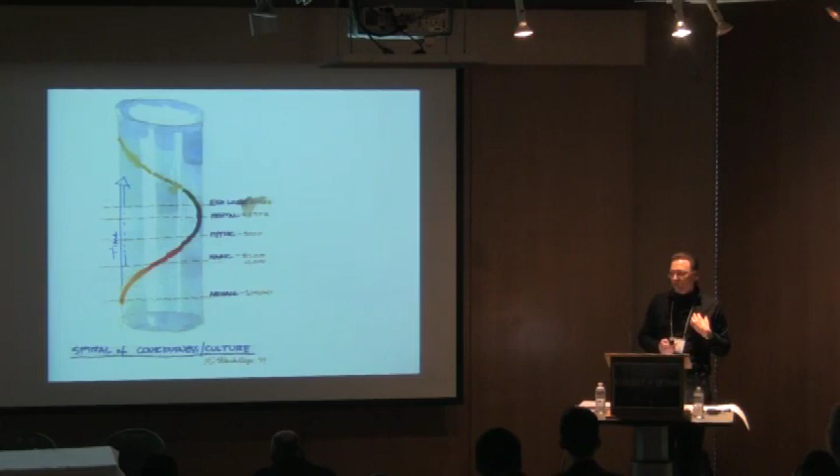You can't do what my school does, which is look at the beginning of design as point, line, and plane—all visual, all abstract, nothing living, no people, no materials, no site, no context. And that's supposed to be the fundamentals of design. We are not there anymore. We are at a new place.

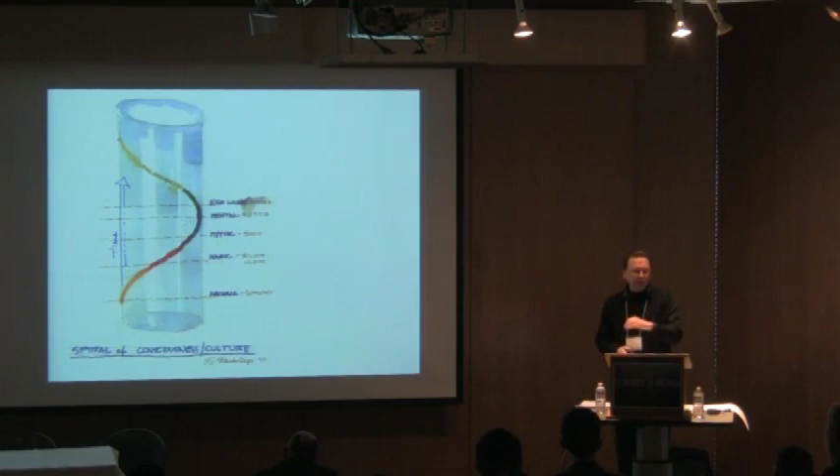So what there really is to do for all of us to accomplish that is some really hard work that we haven't done yet—all collectively, as Susie said, let's be here together. We have to collectively create a community of learners and thinkers to think ecologically, and create a set of transformative practices that will get us there, because you don't get there just by wanting to get there. I'm still working really hard at it, so I'm not saying it's easy.

What there is to do, really, is to develop ourselves—to develop ourselves as ecological designers and ecological thinkers in community with each other.

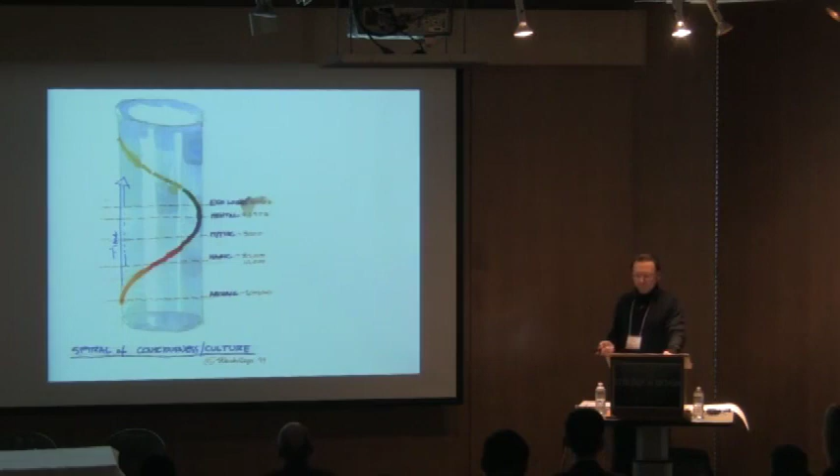I'd like to end with an excerpt from a poem by Wendell Berry, who lives in Kentucky, farms with mules, and is a poet. Wendell Berry says: 'The field must remember the forest, and the town must remember the field, so that the wheel of life will turn, and the dying be met by the newborn. Seeing the work that is to be done, who can help wanting to be the one to do it?'